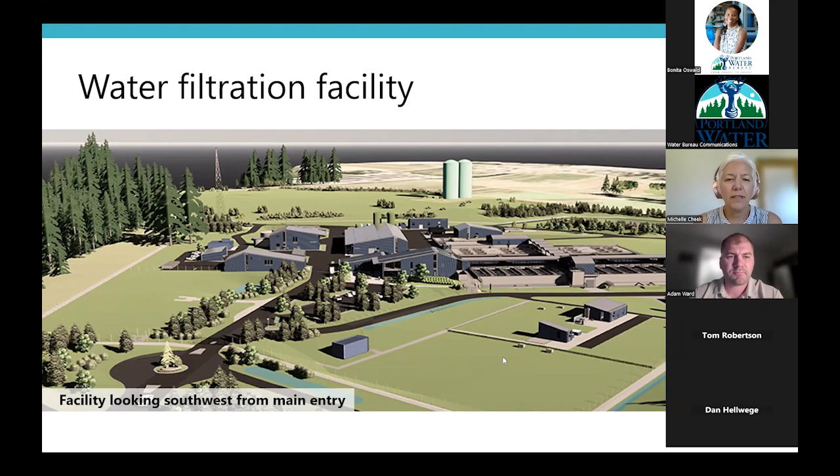And then that settled water moves on to the filters where the water is filtered to remove any remaining turbidity or sediment or contaminants such as cryptosporidium that are in the water before the filtered water then continues on to that clearwell that I mentioned. So that's the whole site and the process.

And the project is not just about the treatment facility. We also have to get water to and from our new facility. And to accomplish that, we'll be constructing approximately 7 miles of new seismically resilient water pipelines to convey water to and from the facility and our existing pipelines in the area. To the east of the facility site, we have a new unfiltered water pipeline that will convey water from our existing pipelines in Lusted Road to the southeast corner of the facility.

And then to the north and west of the site, a new filtered water pipeline will convey filtered and treated water from the Clearwell to a new finished water intertie, which is located on the south side of Lusted Road. And then from our finished water intertie, water will travel down some new finished water pipes that connect to our existing pipelines that head into Portland.

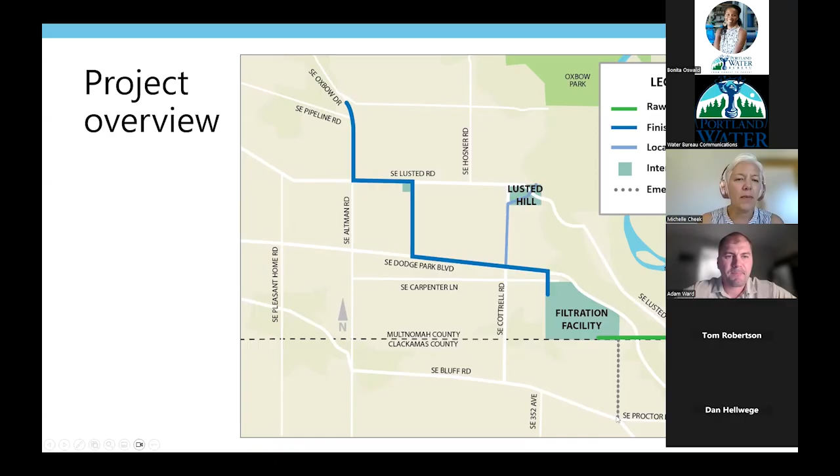And then we do actually serve some customers in the area. And so we'll be constructing a local distribution main in Cottrell Road to provide filtered water to our existing customers in the area. And then access to the filtration site during construction and ultimate operations will be east off of Cottrell Road and onto Carpenter Lane, entering the site from the north. But there will also be an emergency access to Bluff Road in Clackamas County to the south. Next slide.

So as most of you know, since we last met in January, LUBA remanded or sent back to the county one item related to natural resources. The remand required us to stop work until the remand process was completed, and we received reapproval from Multnomah County. And we did receive that reapproval in late June, and the contractors have been remobilizing and ramping up construction activities with a full ramp up expected by the end of the month.

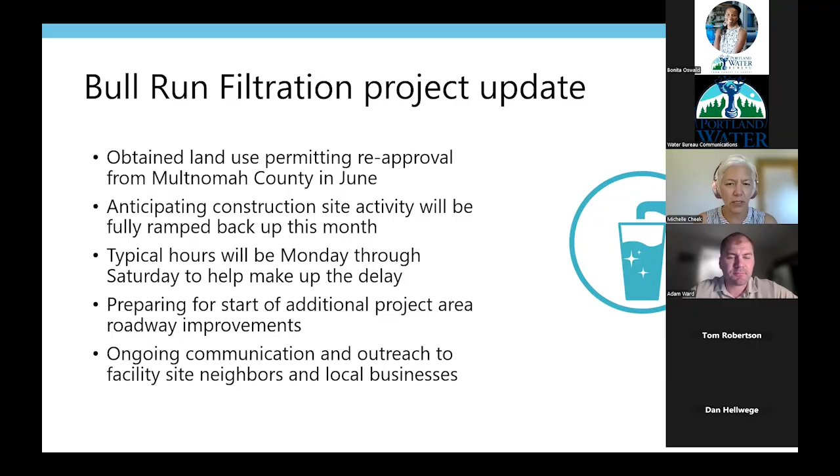To help make up some of the delay due to the remand and also take advantage of the nice weather, our typical construction hours will be Monday through Saturday for the foreseeable future. So, what else? In addition to the facility and pipelines construction activities, we're also preparing for some additional roadway improvements in the area to maintain our haul routes in a serviceable condition, which is a good segue into the next slide.

So with the construction ramp up comes increased truck traffic. Our trucks are required to follow allowed haul routes, some with restricted hours during school drop off and pickup times, which is extremely important as school restarts on September 2nd. The haul routes that are actually used will vary throughout the project depending on the activities occurring at the project sites, but trucks must follow the allowed haul routes and any haul route restrictions at all times. All the haul routes have been signed in the field, and haul route maps have also been provided to our construction truck drivers as part of their project training.

The orange box on the haul route map is the Multnomah County project area and was defined through the land use process. So in addition to ensuring trucks are following the haul routes, our contractors are also responsible for monitoring and maintaining the condition of roads in this area. So the contractors have staff doing spot checks on road conditions such as dirt and potholes, and making sure trucks are following the allowed routes. Next slide.

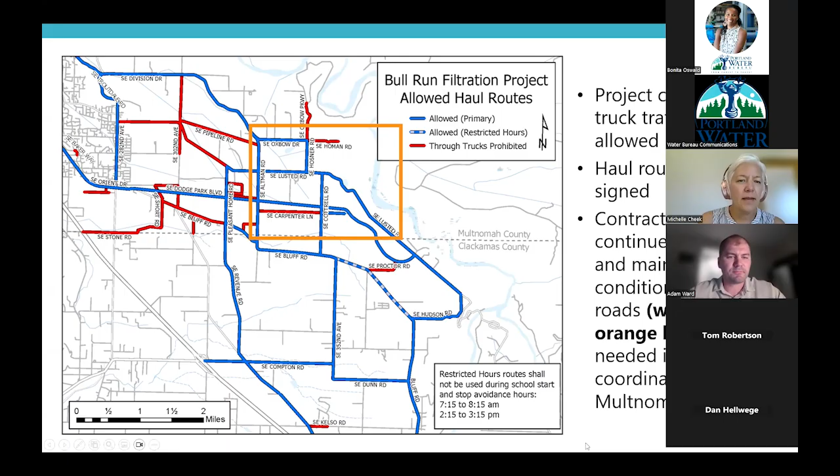So the Water Bureau has also been working closely with Multnomah County on road conditions in the area and addressing any issues when necessary. So for example, 2 of the roads designated as haul or detour routes on the map that I just showed for construction traffic are scheduled for repaving in the next couple of months. So Cottrell Road between Lusted and Bluff is scheduled for September.

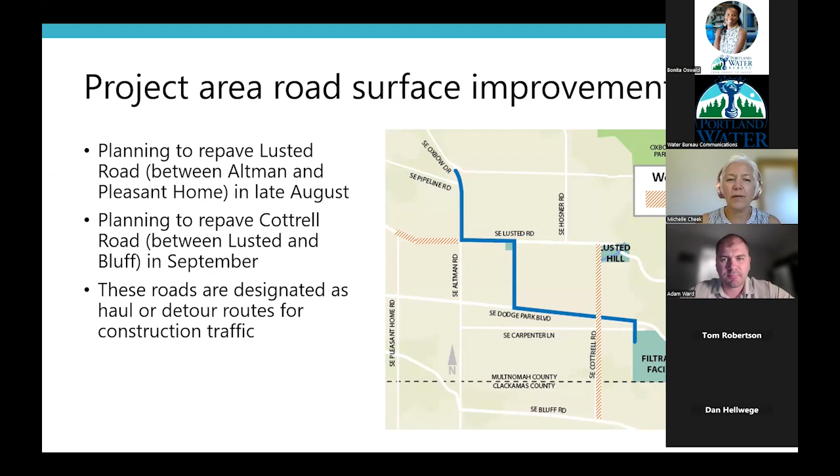And some of you might recall we temporarily stopped using Cottrell due to repairs that weren't holding up, but we recently received Multnomah County's approval to resume use of Cottrell Road until the repaving work is completed in September. And until the repaving work starts, we'll be inspecting the road daily and completing any needed repairs. And then we'll also be repaving a portion of Lusted Road between Altman and Pleasant Home in late August. So that's a little heads up on some of the road work headed your way. But now I'll pass things over to Adam for some more updates on the pipeline project.

Thank you, Michelle. Just to get us started, just a little more detail on the pipeline project. We designate two different pieces of work for pipeline. There's the raw water side, which is the green line on the map there, and the finished water side, which is the blue line. So on the raw water side we'll be connected into three existing lines, but those will convert into two pipes that'll go from Southeast Lusted Road on the bottom right-hand corner and make their way to the filtration facility. Now on the finished water side, down Dodge Park, you'll see one single pipe running down Dodge Park. It'll turn north onto Lusted until it hits the little blue box on Lusted and Farmfield. Thank you, Aubrey. Which is what we call the finished water intertie.

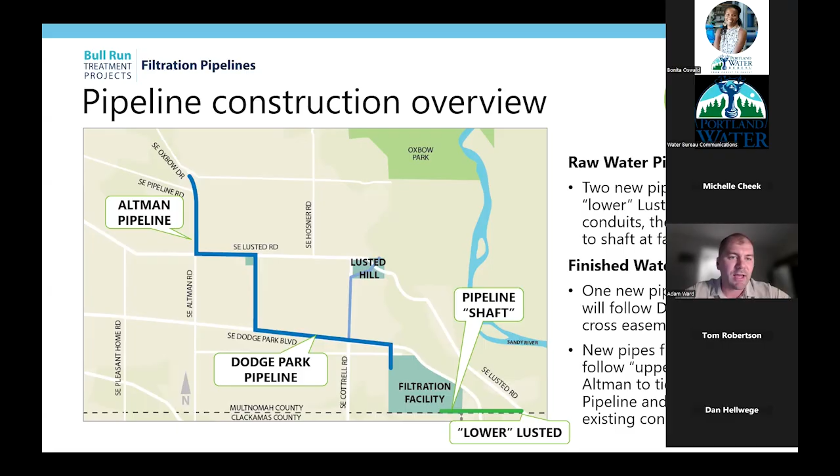Out of the finished water intertie, you'll see three pipes come out of there, and those three pipes will run down Lusted. One will make a connection at the intersection of Altman and Lusted. The other two will head north up Altman Road, with one of them connecting at the intersection of Pipeline and Altman. And then the last final pipe will connect up at the intersection of Oxbow and Altman. And that's how we get the new finished water lines into the existing PWB pipeline system. I think I covered it. Okay, next slide.

So those of you that have been out in the area, you've noticed that there's been a lot of work happening on Dodge Park Boulevard right now. We're on the south side of Dodge Park, putting in that main finished water pipe that I talked about on the last slide. During the day, it's down to one lane that is flagged each direction. And at the end of the workday, they remove it back to normal traffic and put those temporary barrels behind the concrete barrier that is located south of the fog line on Dodge Park. They've completed about 300 feet to date. You can expect to continue to see this impact through the end of October.

At the end of October, all the road constraints will be removed from Dodge Park, and we'll move our focus on to Lusted Road, which I'll talk about later. The other thing we want to highlight here is in the month of October, that is the one month where we are allowed per the conditions of approval to do closures on Dodge Park.

There's a few crossings that we need to do on this project at Dodge Park. The ones that we'll be doing this October are near the intersections of Cottrell and Dodge. So one of the crossings will be on the south side of that intersection going across Cottrell, and the other crossing will be on the east side of that intersection going across Dodge. And we plan to execute both of those in the month of October.

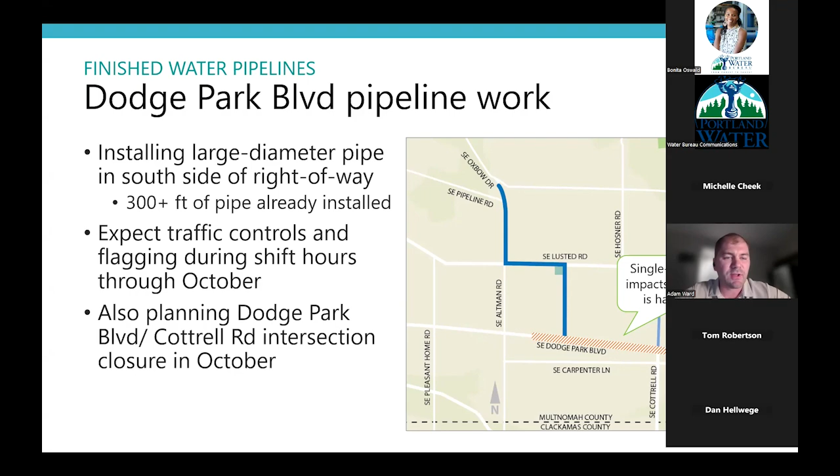But of course, we will make sure local traffic and emergency vehicles, buses, farm equipment, everybody can still make their way through. However, it'll be closed off to other individuals. Next slide.

This just kind of gives an overview of what's happening on Dodge Park right now, just kind of the general activities that will go on for a pipeline job. On here, even before we start excavating, the first thing we do is we set up all our SWPPP, which is our stormwater pollution prevention plan. So you'll see silt fences, you'll see straw wattles, whatever's required to ensure we control any type of erosion that may come off from this project.

We'll set up our traffic control, our concrete barriers so we can keep the public and our workers safe during these projects. And then we will start doing the excavation work. After excavation, we'll get the pipe delivered and we'll start putting the pipe in the ground. We'll have big shoring boxes that you may have seen when you're on Dodge Park to keep our workers safe.

And also what we'll do before we start backfilling is there's a lot of quality testing that happens, which may appear why the work is not moving as quickly as one would think. But that's just because we want to make sure that we're putting in the pipe to the quality standards that's necessary for drinking water that's sending to Portland. So we go through a very rigorous process, and we have a very stringent quality program on this project.

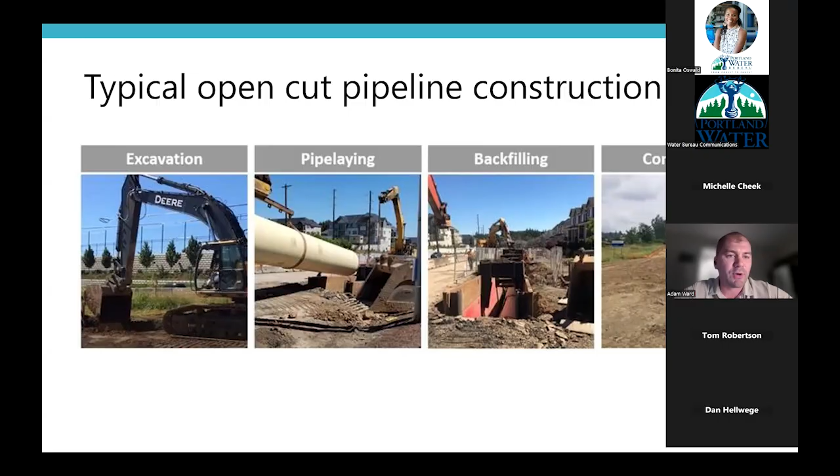Once we get through those tests, then we will start backfilling. Even backfilling has its challenges. You have to make sure you go slow and small lifts so that you're not affecting the shape of that pipe as you're putting soil and aggregate on top of it. And then lastly, once it's backfilled, is when we start the restoration phase, where we either fix the roads or bring the landscaping back to standard. So it's kind of an overview of the pipeline install process.

Now, the reason we're doing this is there's a lot of different scopes that are going to be happening on Altman Road. We'll be finishing the installation of Pleasant Home Water District line. For those that remember, that was the work that was happening on Lusted right before suspension. That work has now turned up the road and is heading up Altman, and it'll do its final connection at the intersection of Pipeline and Altman.

Some other work that's happening up there. It's one of our tie-in points, so we'll need to do some exploratory work where we can access the existing line to get the data that we need to make sure that we fabricate the connection piece correctly.

And then the last bit of work that's happening towards the end of this closure, which is around the beginning of October, is we'll be running the two new water lines just north of the intersection of Altman and Lusted, so that we time it just right, that when November 1st hits, we pull all our traffic control off Altman and we move it east on Lusted, where we'll continue to install those two raw water lines, or finished water lines, I'm sorry.

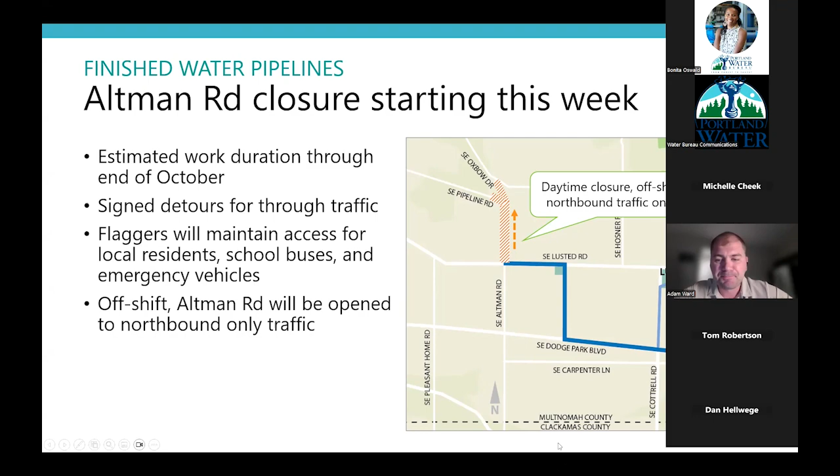And then just looking a little further ahead with upcoming pipeline work. In August and September, which is now, outside of the roads, we're inside the fence for us. We'll still be doing the excavation for what we call the portal and shaft. So this is the tunnel for the raw water side that goes from Lower Lusted to the filtration site. So we'll continue to excavate down for those. And also we'll be mobilizing in September for the finished water intertie site. So you'll start to see some action just off Lusted Road, east of Altman and Lusted.

In November, we'll be tunneling underneath Carpenter Lane. That work got held up right at the suspension, so we'll be bringing that work back for November. We'll be starting the installation of the distribution main that Michelle mentioned early on Cottrell Road in November. And also, as I stated before, the finished water pipe on Lusted will begin November 1st as well. And then going into the spring, once we move off Lusted, which will be in the end of April, we'll come back to Altman Road to finish that finished water pipe, starting down by Oxbow and Altman intersection, moving south.

And we'll also be planning to do the blasting through the lava rock on the southeast corner of the facility. And those of you that were at the neighborhood meeting we had before the suspension, we kind of showed a video and an overview of what that's going to be like. And we'll continue to get more information out to the public on that scope as we get closer to it in the spring next year.

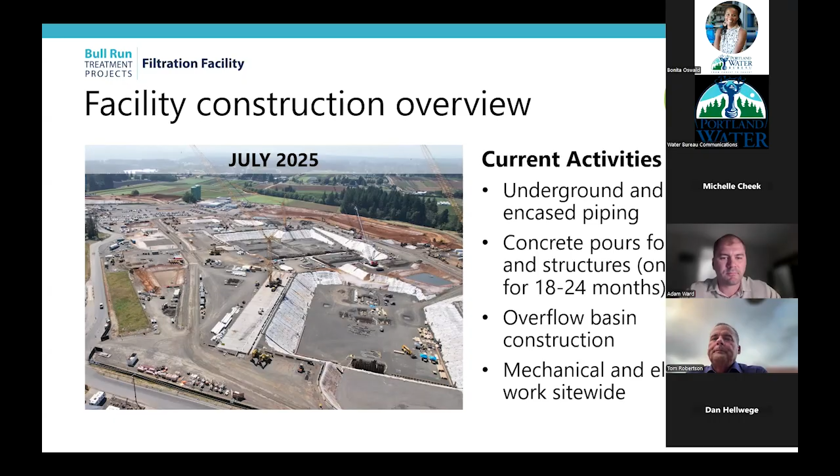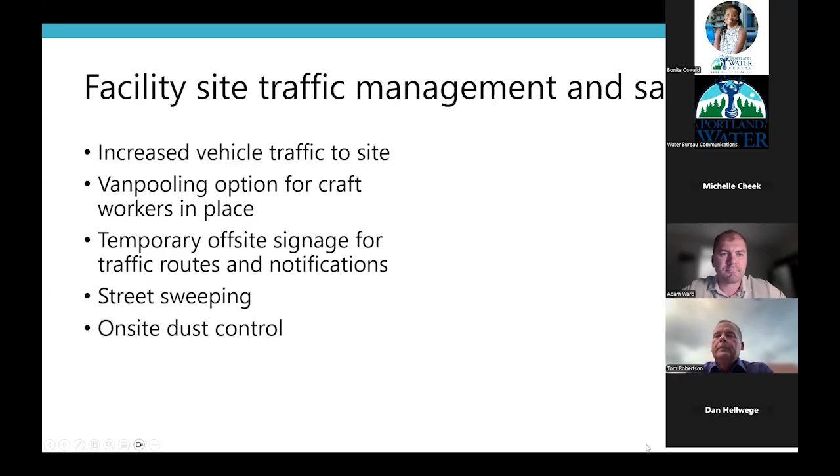You're on mute, Bonita. I gotta take myself off of mute. I think after 3 years after COVID, it works better. Figure it out. Yeah, it does work a little bit better.

So it's time for questions and comments. If you have a question or a comment you want to share, then you can just raise your hand. You can come off mute. You can just start talking off mute. I wouldn't use my example of how to get yourself off of mute, but you can also type in the chat. Keep an eye on the chat to see if anybody has any questions or comments they'd like to share.

Right. Checking the chat. Seeing anything there? Any hands? Welcome, Jeff. We're just actually kind of getting to the end of this. If anybody has any questions or comments, again, this meeting is recorded, so this will be available on our website so you can view it later. And you can always contact us later if you have questions or comments. Encourage you to share this meeting information with your neighbors. Encourage them to show up if they want to learn more or have questions.

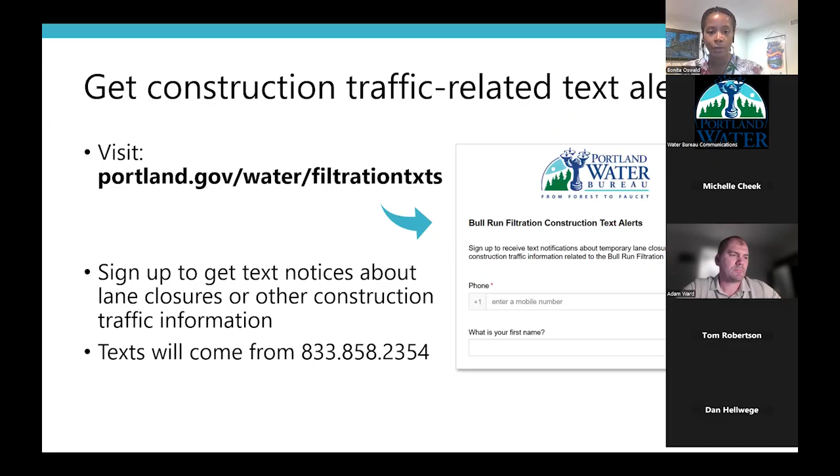We also have text alerts. These text alerts will be specifically for the construction updates. So each week we send out a text alert that tells you where the road closures and lane restrictions are happening. So you can sign up for that. And the text will come from 833-858-2354. Go to the next slide.

And you can contact us anytime. You can call our hotline. It's 503-823-1505. And that is a voicemail hotline, but there's a number of people on the project team that review those messages. So I know a lot of people have my phone number, which is fine too, but for the most prompt response, it's good to leave a message, and we can get that directed to the person who can best answer that quickly.

So if you see dirt on the road, like Tom was talking about, or if there's any sort of trucking violation that you see, or you just have a question about the project, feel free to call that hotline and we'll get back to you on that. We also have an email address dedicated for this project. Again, a lot of you have my email address, but this email goes to a number of people so we can get back to you more quickly. And then you can also visit our Filtration construction site that has a lot of information about what's happening for the week coming up and then beyond that time.

Next up, we will have our coffee with the contractor. That's an in-person meeting, and that will be at the Grange on September 11th. October 9th we're planning to have an open house, and that will be in person as well. We'll probably share the slides or information that we're sharing at the in-person open house on our website. But that open house will happen in the morning in Sandy, and then in the evening, closer to the site at the Grange. And then we'll continue with the coffee with the contractor in November and December, and then we'll be back here on Zoom in January. Go ahead and go to the next slide.